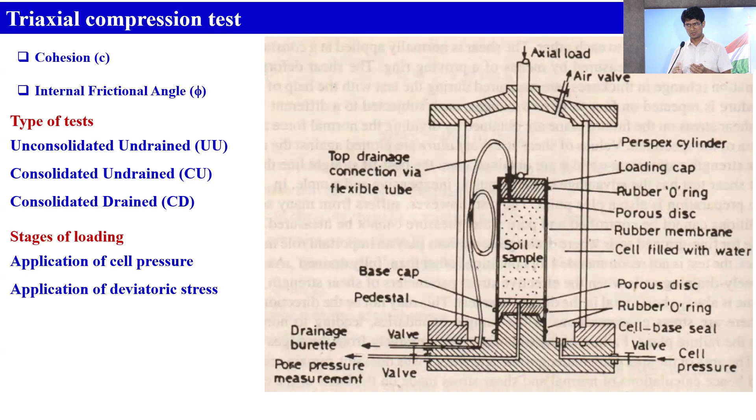Now pore water pressure is there. Initially it is equal to the same amount if it is fully saturated. So effective stress will be very negligible. Now when water is drained out, there is a decrease in the pore water pressure. Effective stress is total stress minus pore water pressure, so effective stress will gradually increase if we are doing consolidation. But we are not doing consolidation in the first case, that is the UU case.

So since we are not doing it, see there are 3 regular circles and only one dashed circle. That dashed circle is the effective stress circle, and all these regular dark-line circles correspond to total stress. Suppose for the first circle the confined pressure sigma 3 is 50 kPa, second is 100 kPa, third is 150 kPa.

Now we have applied no consolidation. Then we are gradually applying the deviatoric stress. So in the first case, suppose failure occurs at a particular magnitude of deviatoric stress, 30 kPa or something. Whatever load you are applying, solid particles are not carrying any load. All load will be carried by the water. Then a stage will come where the water will have some resistance, and that will try to fracture the soil. That failure occurs.

So during that time there is cohesion, that is the bonding between the particles, and friction, that is due to rolling or sliding between the particles, or a combination of rolling and sliding. Since solid particles are not taking load, failure occurred due to whatever pore water pressure developed. That is at a particular confined pressure.

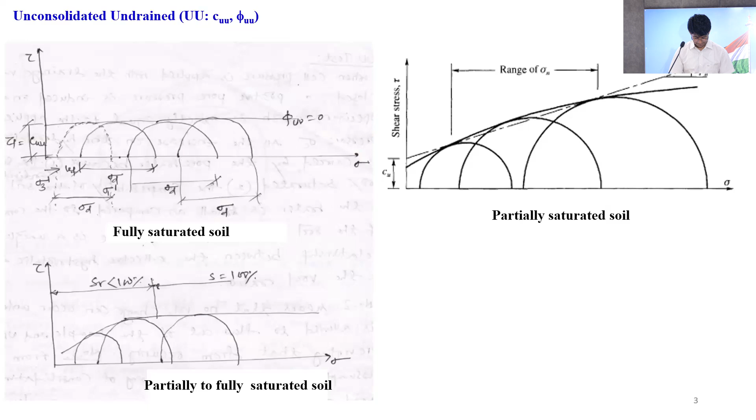So one question is whether the soil is normally consolidated or overconsolidated. Now I have loaded the soil up to 900 kPa, meaning I am applying confining pressure up to 900 kPa. Then with 900 kPa I will open the drainage valve. It will get consolidated, and there will be a decrease in volume. It can take 2, 3, even 7 days for all the water to drain out. When the deformation remains constant, it indicates the soil is fully consolidated.

Now with that 900 kPa, you apply the deviatoric stress. When applying deviatoric stress, we consider the undrained condition. Consolidated undrained: the first stage is consolidation, due to application of confining pressure. Once consolidation is over, we close the drainage valve. Then I apply the load in the vertical direction, and it will increase. When it increases, what will happen? Same thing.

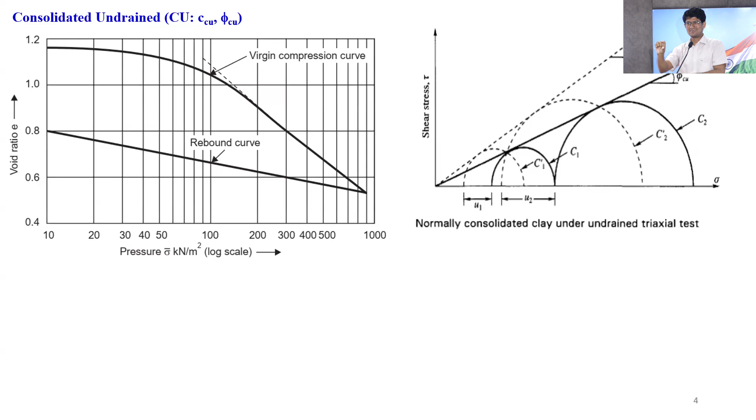Clear? But when it is over consolidated soil, the pore water pressure will be negative. There will be suction. Now consider the pore pressure measurement. This is the level. In normally consolidated soil, it is above the normal level, positive pore water pressure. When it is over consolidated soil, we get below it. This is negative pressure. Some suction is developed inside the soil. So that's why in some cases you will see the effective stress circle is on the right side of the total stress circle.

Soil particles are there. Now they will try to push the particles, but they are not able. What's the point? There are two particles, and inside there is water. So when we are applying load, all load is carried by the water. Now water will have a tendency to find a path, but the drainage path is already closed. So they will try to move, but water is not able to move.

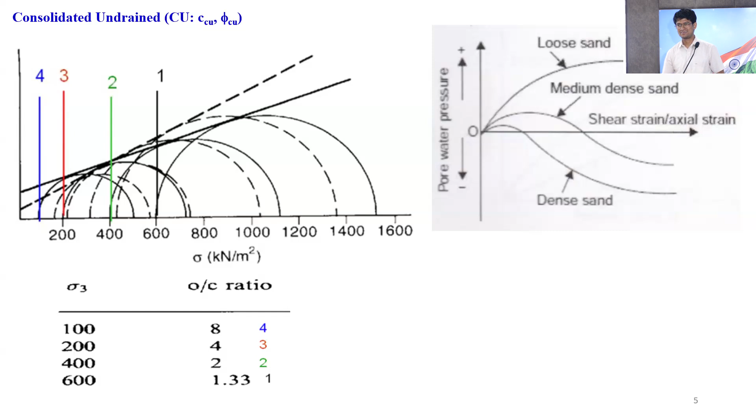That means the water in between those two particles will try to force these particles, and particles cannot move because it is confined. So this gives positive pore water pressure in case of a normally consolidated clay. In over consolidated clay, it is opposite. What will happen in that case? Tension is developed in the water. The particles will try to move away from each other. Then tension will be developed. That's why negative pore water pressure is developed in the over consolidated case.

Now consolidated drained test. In the consolidated drained test, first we are consolidating, drainage is open. In the second stage, when we are applying the deviatoric stress, the drainage valve is open. Now this test generally takes about 1 month. One sample will take 1 month. To saturate the sample, it will take minimum 4-5 days. Consolidation will take 1 week. Then application of deviatoric stress up to failure will take 10 days.

Why? In a UU test, suppose we are applying 100 kPa deviatoric stress. We will apply at 10 kPa per minute, so within 10 minutes the test will finish. In the consolidated drained test, I will apply 0.1 kPa per minute. Why? To simulate the field condition. If I apply 0.1 kPa, what will be the pore water pressure development? If it is undrained and water is not dissipated, it is 0.1 kPa. 0.1 kPa is a very negligible amount. That will not cause any harm to the soil.

So gradually we are applying 0.1 every minute, so there will be no development of pore water pressure throughout the test. Water is gradually draining out, but there is no development of pore water pressure, because our rate of loading is very low. That's why we call it a consolidated drained test. That's why total stress and effective stress are the same. We will get only one parameter. But in the CU test, you will get total stress parameters and effective stress parameters. In UU, we will get only total stress parameters because we cannot draw effective stress circles.

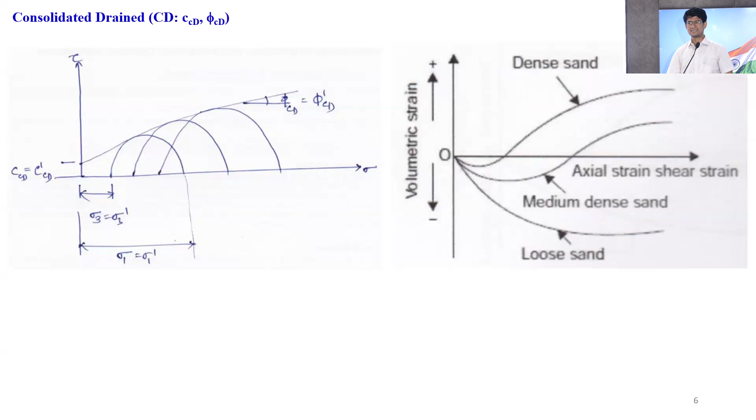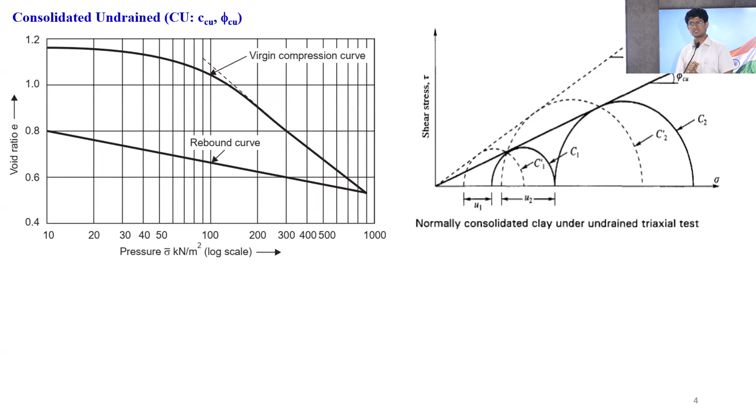Now in this case of over consolidated soil, when you draw the tangent, we will get both a cohesion intercept and phi. One more thing. In the previous case, the effective stress circle is on the left side of the total stress circle. What does that indicate? Effective stress is less than total stress. Effective stress equals total stress minus pore water pressure. That means the pore water pressure is positive. But in over consolidated soil, the pore water pressure will be negative. There will be suction.

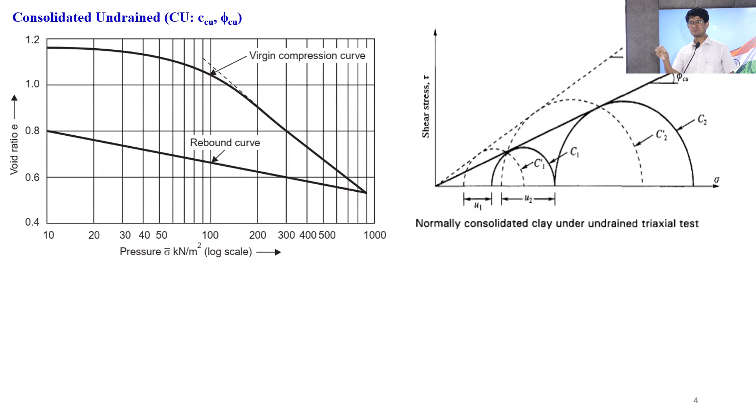Now we are considering the pore pressure measurement. This is the level. In normally consolidated soil, it is above the level: positive pore water pressure. In over consolidated soil, we get below it. This is negative pressure; some suction is developed inside the soil. That's why in some cases you will see the effective stress circle on the right side of the total stress circle. The behavior changes depending on the over consolidation ratio, and that also affects our shear strength parameters C and phi.

Next, this part shows pore pressure development on the right side. Generally we consider loose sand behavior similar to normally consolidated clay, and dense sand behavior similar to over consolidated clay. So for loose sand or normally consolidated clay, you get positive pore water pressure from the beginning. The upper side is positive, the lower side is negative. If it is over consolidated clay or dense sand, initially there will be positive pore water pressure.

Why does that happen? Because when we apply the force, the water cannot move out. Since water is not able to move out from the soil, the soil particles will try to come closer, but they are not able. The point is, there are two particles with water inside. When we apply load, all the load is carried by the water. The water will tend to find a path, but the drainage path is already closed. So they will try to move, but the water is not able to move.

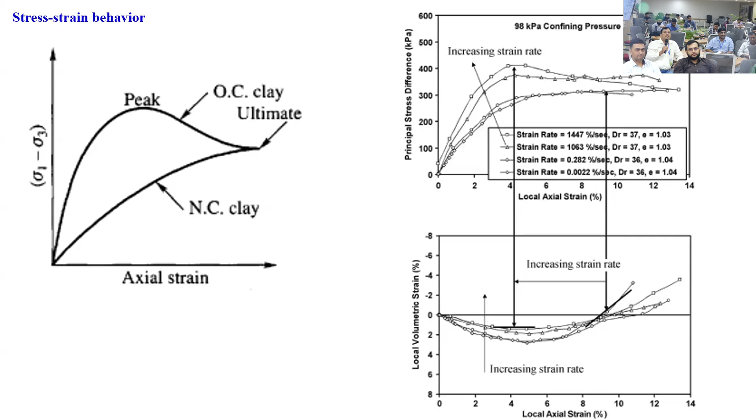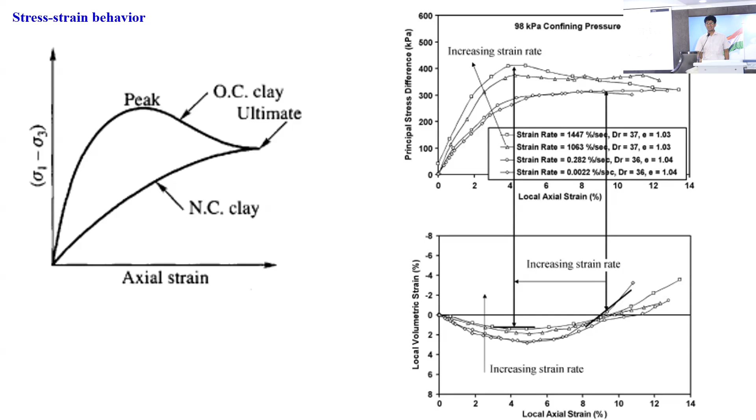Okay. From these 3 conditions, unconsolidated undrained, consolidated drained, and consolidated undrained, we only get effective stress in only one condition? That is drained. In consolidated undrained, you will get both effective and total. In consolidated drained, both are same, whether effective or total. Clear? And in unconsolidated undrained, you will only get total stress parameters, and those total stress parameters are used for the undrained shear strength, when we are determining short-term stability.

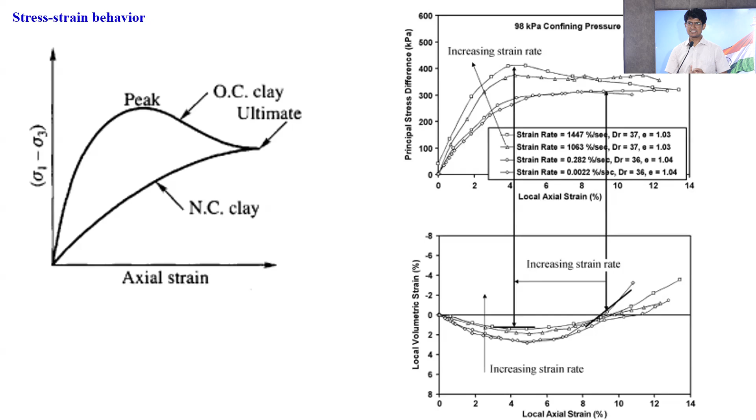Please repeat it from the beginning. One is UU, that you will get only total stress parameters. Clear? Then another is CU, consolidated undrained. You will get both total stress parameters and effective stress parameters. Third is consolidated drained. We will get total and effective, both are same. There is no difference. Clear? Because pore water pressure is 0. Yeah, 0, throughout the test it will be 0.

So in most of the cases, while designing the dam, we consider consolidated drained. We are also considering the undrained condition, UU condition. Short term, there are 2 conditions. When we discussed slope stability, there is short-term stability and long-term stability. In long term, we are saying factor of safety 1.5, and there we are considering drained parameters. And if it is short term, then we are using the total stress parameters, only undrained shear strength, we are considering.